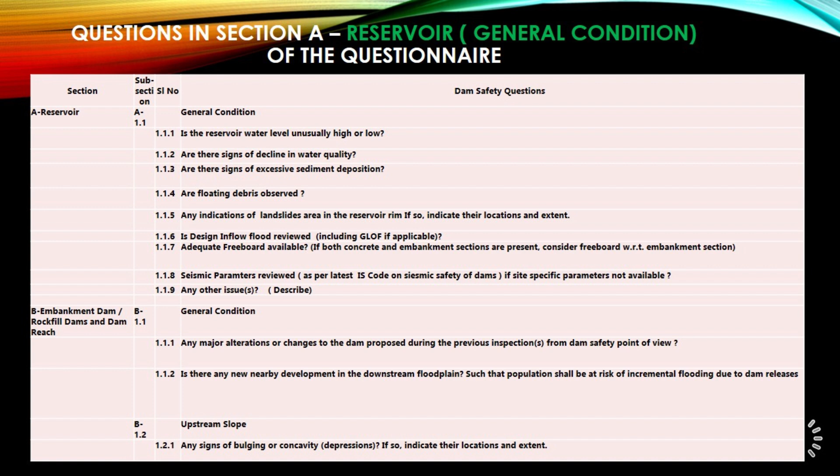Is the reservoir water level unusually high or low? The term unusually refers to deviation from expected, historical, or safe operational ranges for the reservoir water level during a particular season or condition. Unusually high could mean levels approaching or exceeding full reservoir level, FRL, maximum water level, MWL, or even the top of dam.

Unusually low could indicate levels below the minimum drawdown level, MDDL, dead storage level, or lower than seasonal norms as per rule curve. Now let's proceed further to slide number 5.

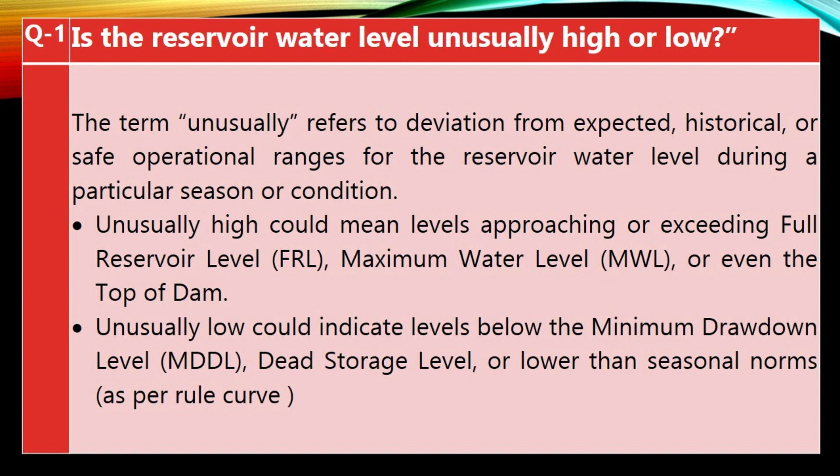Why are conditions like unusually high or unusually low water levels concerning? The table describes the possible concerns. I will read the condition and related concerns so the inspector can answer the question about his or her project accordingly. In case of unusually high water level, the concerns could be overtopping, slope instability, excessive structural stress, reduced freeboard margin, dam breach, downstream flooding, EAP activation and public safety, etc.

For unusually low water level, the concerns could be upstream slope failure due to rapid drawdown and exposure of structural components. Low water levels may expose intake structures, galleries, and inspection drains, increasing the risk of physical damage or tampering, loss of hydrostatic balance, reservoir rim collapse, etc. After discussing the concerns associated with this question, let us move to the next slide, where we will discuss the possible causes for such a condition.

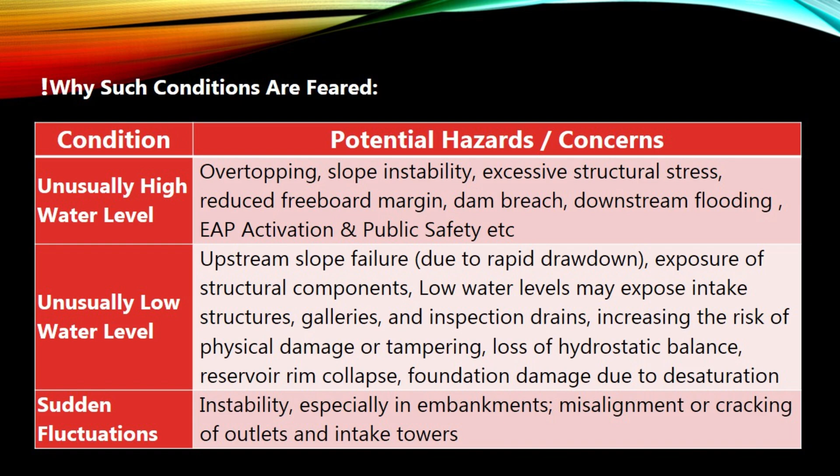Now, what could be the causes behind such happenings, conditions like unusually high or unusually low water levels? These could be: 1. Extreme rainfall or flood events, which may be due to intense or prolonged rainfall, cloudbursts, or upstream floods. Cause 2, inadequate spillway discharge or gate malfunction, which may be due to spillway gates not operating correctly due to mechanical failure, power loss, clogging due to debris, or operator's error.

Cause number 3. Delayed or improper reservoir regulation, which may be due to human error, delayed decision-making, or lack of updated hydrological data. Now let us move to the next slide where some more causes and concerns are addressed.

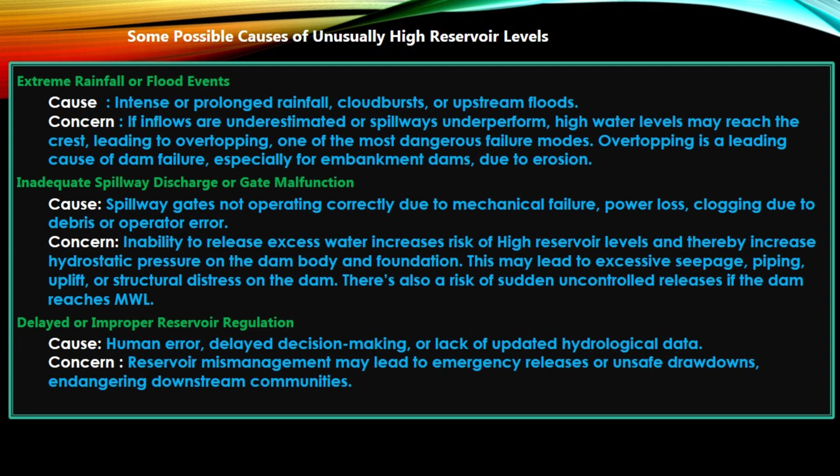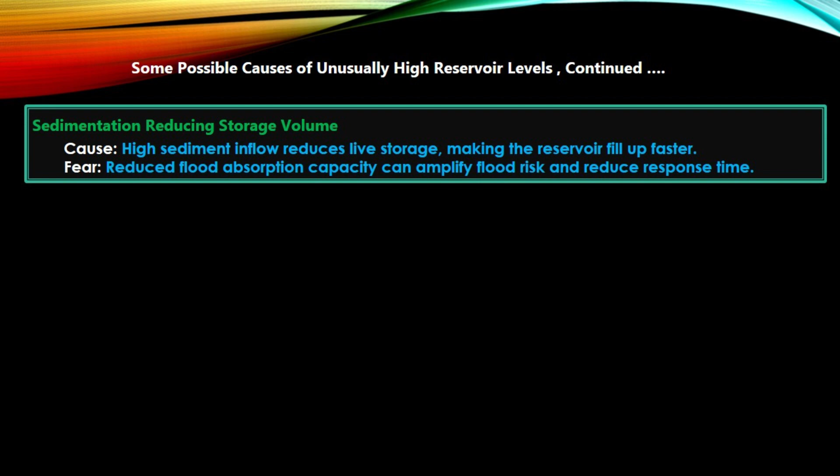Continuing from the previous slide, we come to one more possible cause of high water level in the reservoir, that is, sedimentation reducing the storage volume of the dam. Because high sediment inflow reduces live storage, the reservoir may fill up apparently faster due to flood inflows, which may seem like an unusual rise in water level with respect to the inflows. Thus, there could be several causes responsible for unusually high reservoir levels. Now we shall move to the possible causes of unusually low reservoir levels in the coming slide.

There could be several reasons for unusually low reservoir levels, but the most worrisome or probable one is unnoticed seepage or leakage through foundations or abutments. Let's discuss them one by one. First one is seepage or leakage through foundation or abutments. It could be due to internal erosion, piping, faulty joints, or karstic foundations.

Second reason could be prolonged drought or reduced inflows, and this could be due to poor monsoon, upstream diversion, or climate change-induced inflow reduction. Another reason could be over-release for irrigation or power, due to political or economic pressure leading to over-extraction of water.

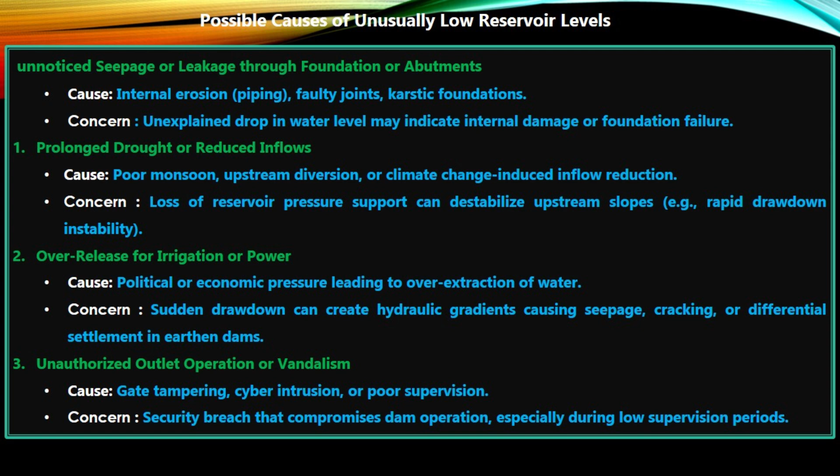Unauthorized outlet operation or vandalism may also be one of the causes, which could be due to gate tampering, cyber intrusion, or poor supervision, when an unauthorized person could tamper with, manipulate or destroy the gates to deplete the water. Now let's move to the next cause.

One more possible cause could be emergency drawdown triggered by structural concern. Anomalous readings from piezometers, inclinometers, or visible cracks, or some other structural concern may prompt the authorities to deplete the reservoir. So at the time of inspection, the reservoir water may be found unusually low by the officer inspecting the dam, and he or she may take a note of it during inspection.

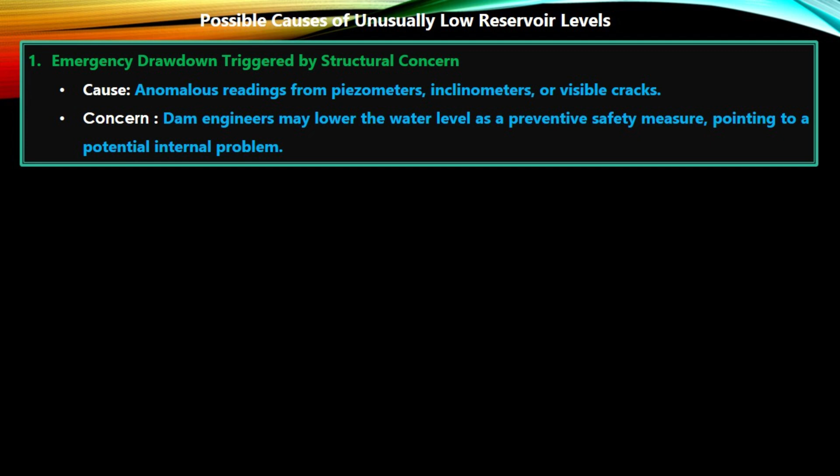This brings us to the end of discussion on the first question on general condition of reservoir. In the next slide, we will be discussing question number 2. Now we shall take up question number 2. That is, are there signs of decline in water quality?

There are several indicators. Firstly, those could be visual indicators in which water appears murky, foamy, oily, discolored, or has floating algae mats. Second indicator might be odor. This includes unusual or foul smells, maybe due to sulfur, sewage, chemicals emanating from the reservoir. Third kind of indicator could be biological indicators. These comprise sudden fish kills, algal blooms, or absence of aquatic life.

Next kind of indicators are chemical indicators, which are detected by testing the water samples. These are presence of low dissolved oxygen, DO, high turbidity, elevated levels of nutrients, nitrates, phosphates, pH imbalance, presence of heavy metals, ammonia, or coliform bacteria. Finally, one indicator could be temperature anomalies, which indicate stratification or sudden warming, which can affect water chemistry.

Now, what could be the causes for decline in water quality? First may be upstream pollution: discharge from agricultural runoff, industries, or untreated sewage may pollute the reservoir. Other could be algal blooms. These are triggered by excess nutrients and stagnant water, especially in warm weather. One more cause may be thermal stratification. In this, layers in the reservoir prevent mixing, thereby leading to anoxic conditions at the bottom.

After discussing the possible causes for decline in water quality, we come to the question, what are the dam safety concerns then, due to decline in water quality? Possible reason could be structural damage risk due to corrosive or acidic water, which can degrade spillway gates, pipes, or outlet structures. Also, sediment with pollutants can erode hydraulic structures and reduce reservoir capacity.

Apart from these, there can be blockage of outlets or intakes due to algal mats. Or sludge can block control gates, causing operational failure during emergency drawdown. Some other concerns related to decline in water quality are health and safety issues, reduced monitoring accuracy, impact on flood management, etc.

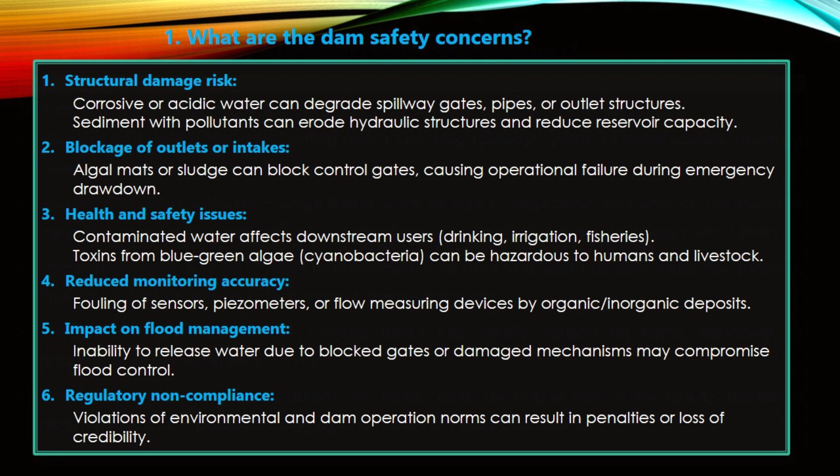Now we will discuss question number 4, which says, are floating debris present? This question in the Dam Safety Questionnaire helps to assess reservoir maintenance, operational reliability, and potential structural risks associated with debris accumulation. We can identify a few safety concerns associated with this aspect like 1. Blocked spillways and intakes, because floating debris can clog spillways, gates, or water intakes, reducing flow capacity and causing uncontrolled water levels or operational failures.

2. Damage to gates and valves, because large debris, such as logs or vegetation, can impact and damage spillway gates, valves, and other control structures, making them inoperable during critical times. 3. Increased erosion and scour, because debris accumulation near dam structures can alter water flow patterns, increasing erosion around spillways and downstream areas. 4. Navigation and safety hazards, because floating debris can create hazards for boats, personnel, or equipment operating in the reservoir.

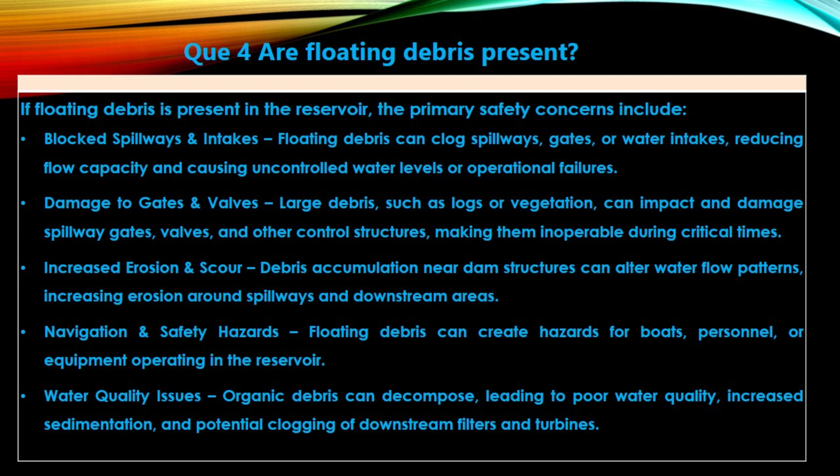And lastly, 5. Water quality issues, because organic debris can decompose, leading to poor water quality, increased sedimentation, and potential clogging of turbines, etc. Quantity of debris is also an important issue. The quantity of floating debris is a critical factor in assessing the safety impact on the dam. The concerns vary depending on the amount of debris present.

If in small quantities, it could cause minor operational inconvenience, possible localized clogging of small inlets or filters. If debris are in moderate quantity, then it may cause partial blockage of spillways, gates, or intakes, thereby reducing flow capacity. It may cause increased maintenance efforts required to clear debris, and potential damage to mechanical components like gates and valves.

Finally, if debris are present in large quantity, that is, there is excessive debris accumulation, then it may result in major blockage of spillways, reducing discharge capacity and increasing flood risk. It may result in significant stress on structural elements due to impact forces. Also, there may be a risk of sudden release of accumulated debris, leading to downstream flooding or erosion. Thus, the quantity, its type like wood, plastic, vegetation, etc., and location of debris should be assessed carefully in the dam safety inspection to determine the level of risk and necessary mitigation measures.

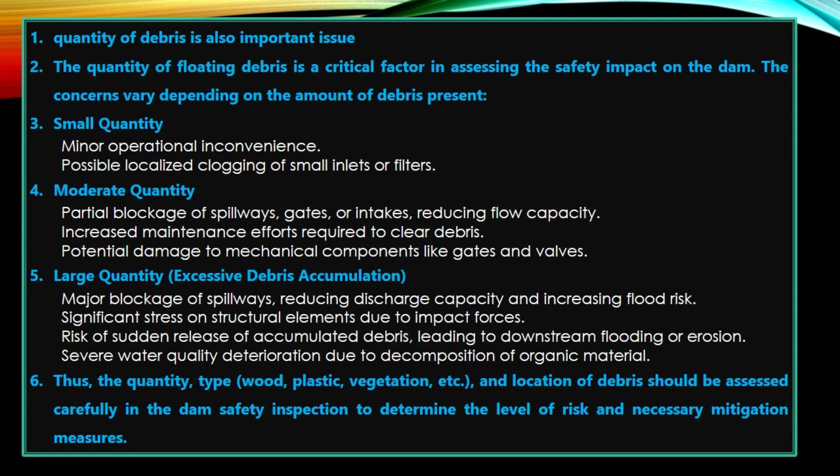This brings us to the end of the fourth question. In the coming presentations, we will discuss further questions in Section A and Section B of the Inspection Questionnaire.